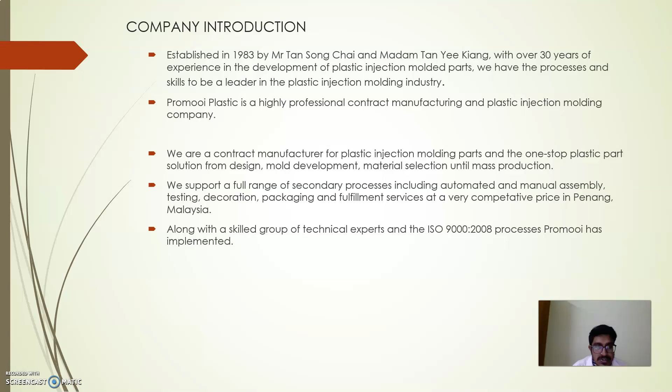Promooi also supports a full range of secondary processes including automated and manual assembly, testing, decorating, packaging and fulfillment service at very competitive prices in Penang, along with the skilled group of technical experts and the ISO 9000 processes Promooi has implemented.

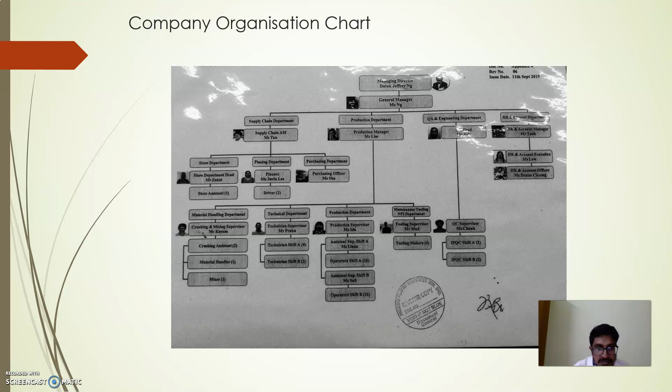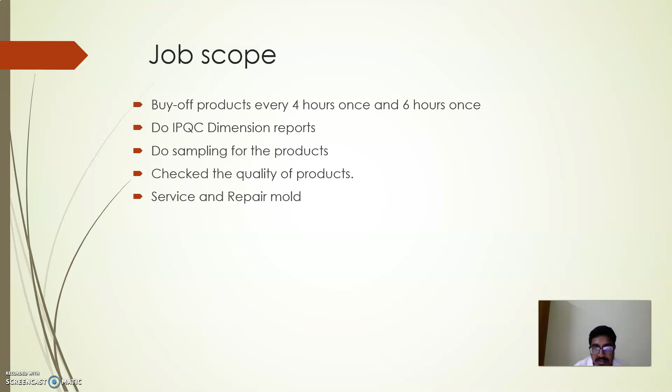My task as a trainee lab technician is to look for the dimensions of the product. I also learned to measure the products using different measurement devices. I also did the IPQC dimension report. I also learned to measure the newly tested products for customer approval.

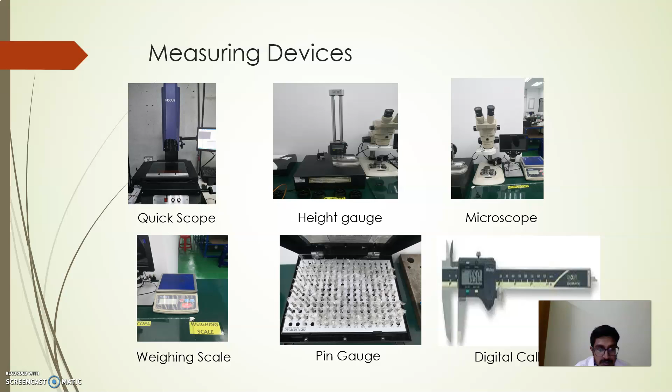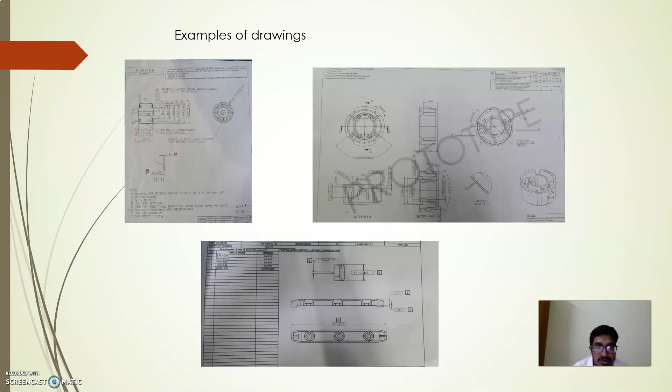Pin gauge. The pin gauge is used to measure the small diameters of the product. And the digital caliper is used to measure the length and dimensions of the inner and outer parts of the product. These are examples of drawings that customers give us to inspect. We also inspect this product according to the customers' drawing.

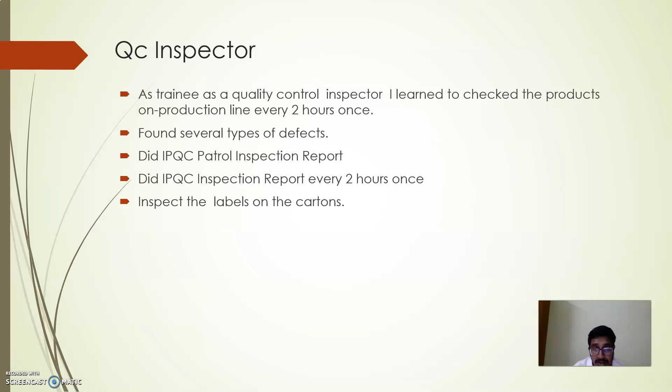Third is QC inspector. I also trained as a QC inspector. I learned to check the products on the production line once every 2 hours. I also found several types of defects. I also did the IPQC patrol inspection report every 2 hours and inspected the labels on the cartons.

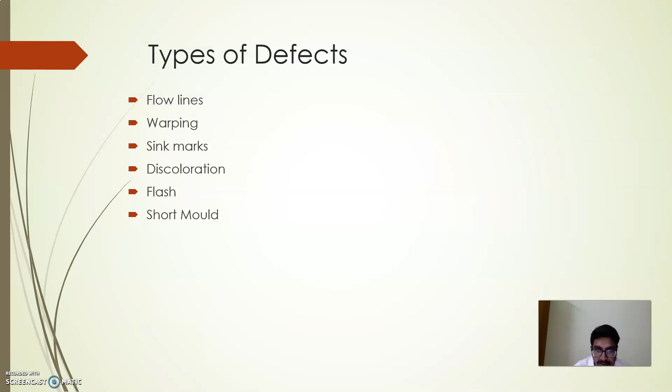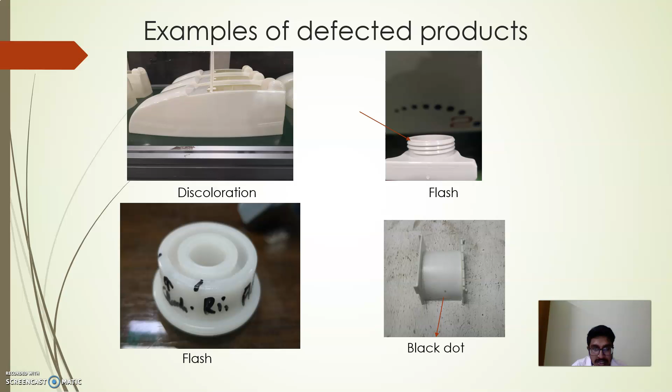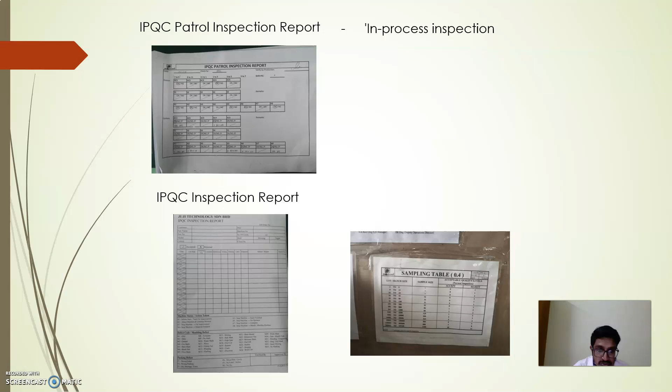And the IPQC inspection report. The IPQC inspection report is to inspect that the quantity and quality of the product is good. So the IPQC inspection report is usually done with sampling.

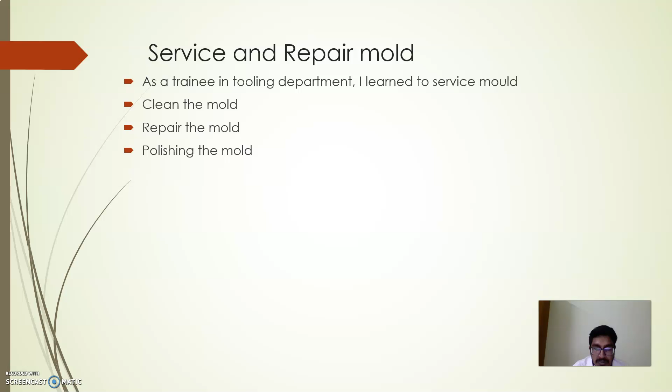What is a mold? A mold is a hollow block that is filled with liquid or pliable material such as plastic, glass, metal, ceramic, raw material, and the liquid hardens or sets in the mold, adopting its shape. A mold is the counterpart to the cast. These are examples of molds that our company has.

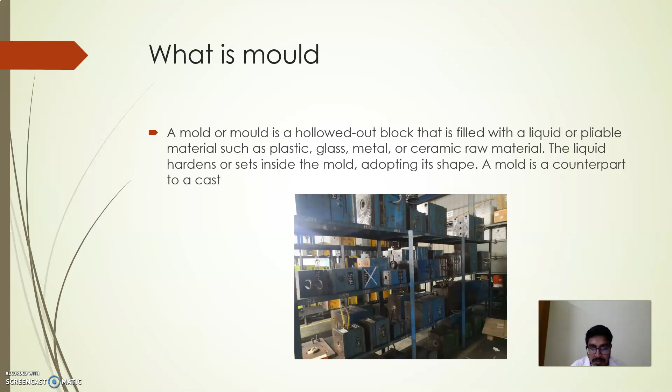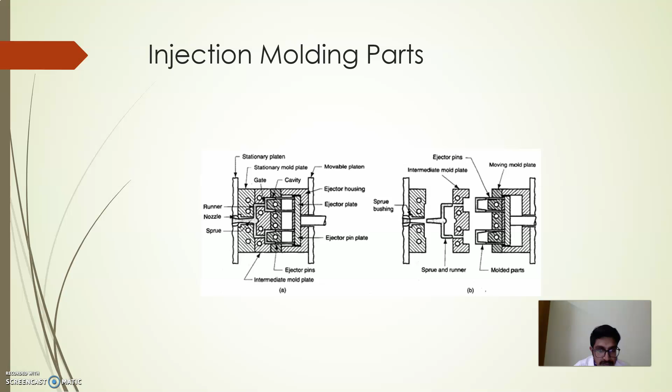The ejector nozzle is used to set the ejection timing, ejection rate and shape. The ejector pins are used to force the part out of the mold. Once the mold opens, the pins extend into the mold cavity, push the part out of the mold and return back.

These are the steps to clean the mold. The toolmaker first examines the mold, looking for any undue wear or gassing, then wipes the exposed mold surfaces with cloth of appropriate material, cotton on highly polished surfaces. Then open the mold separately and clean every pin and slider.

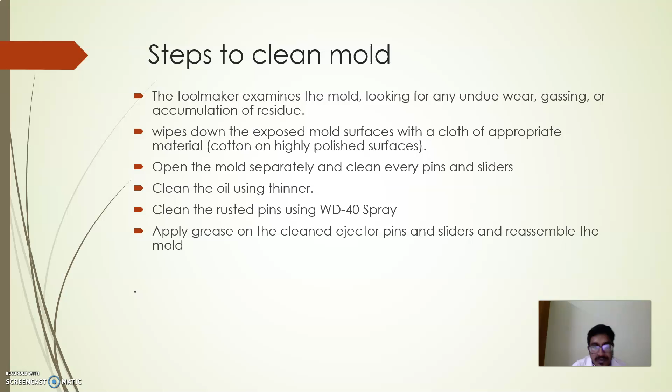Clean the oil using thinner. Clean the rusted pins or rusted parts of the mold using WD-40 spray. Lastly, we must apply the grease for lubricant on the clean ejector pins and sliders and reassemble the mold. Cleaning. These are example pictures of cleaning and polishing the mold.

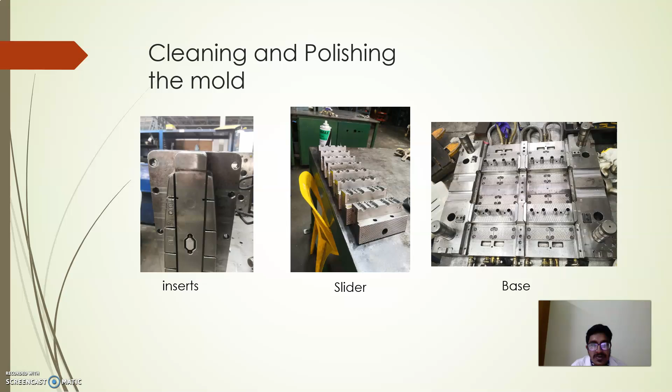Potential improvement. I need to improve my technical skill more in tooling. I also need to learn more complicated drawings of measurements. I also need to learn how to identify the defects easily. I also need to improve the 5S in every task.

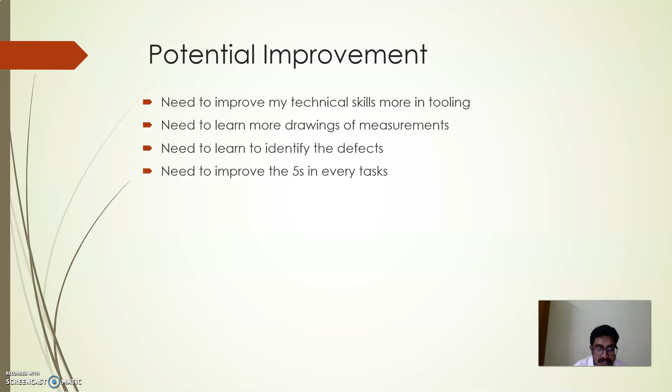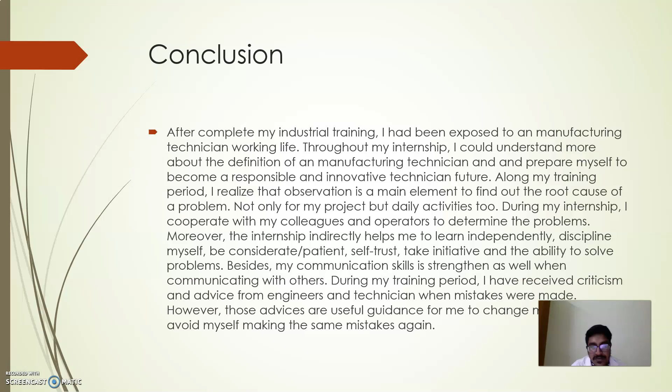What is the skill you gained most during the internship? The skill I gained most during the internship is to measure the product according to the drawings. It's because I was exposed to many complicated drawings during my internship, so I gained more skill on how to use the measuring devices and also how to read the drawings. That's all. Thank you.